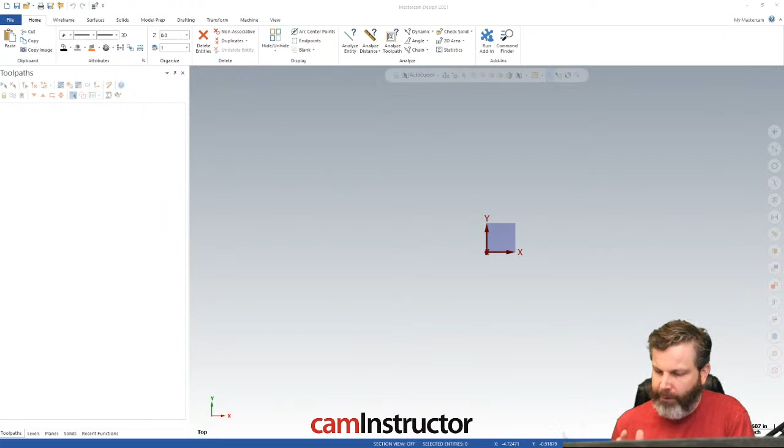Now, when we did the last stream, I said I would put up a poll, and I was going to ask what you guys wanted to see as far as what we go through in the next stream. And I did that, and one of the options was something advanced in Mastercam, and there was an option for something basic and some other stuff. And basically the majority came back and said they wanted to see something advanced in Mastercam.

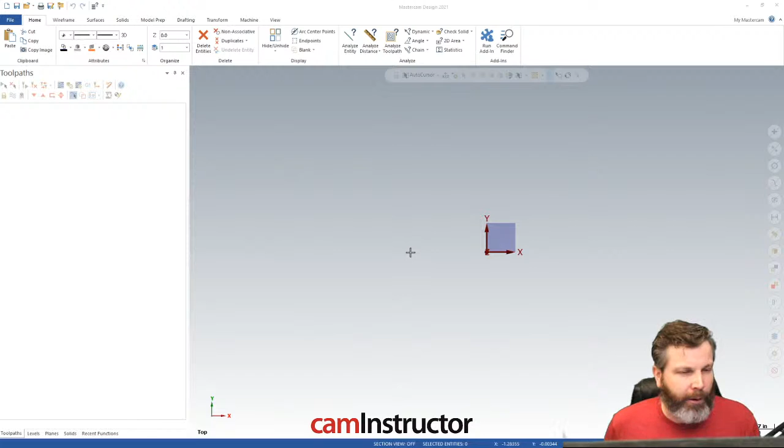So it's still pretty wide open on what that could be. I interpreted this on my own as to what I think could be advanced, while still trying to come up with something new and different that maybe others aren't doing in their streams or their webinars. Resellers are always doing webinars on the latest and greatest toolpaths and all the different little switches you can touch in them and make them better. So I wanted to do something advanced, but still do something different. So that's what we're going to do today.

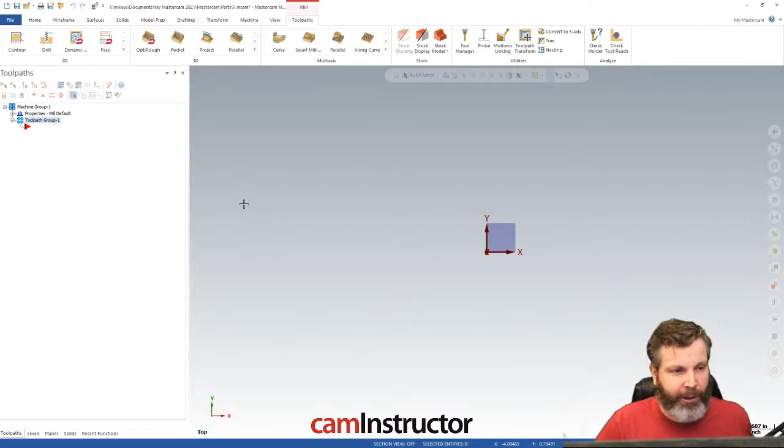And I'm going to start in Mastercam. And my advanced geometry and toolpath is going to be this drill. And I'm going to drill this point here, and I'm going to drill it 1/2 of an inch deep. Okay, so that's pretty advanced stuff we got going on here. I know, right? I promise you it's going to get better in a second here.

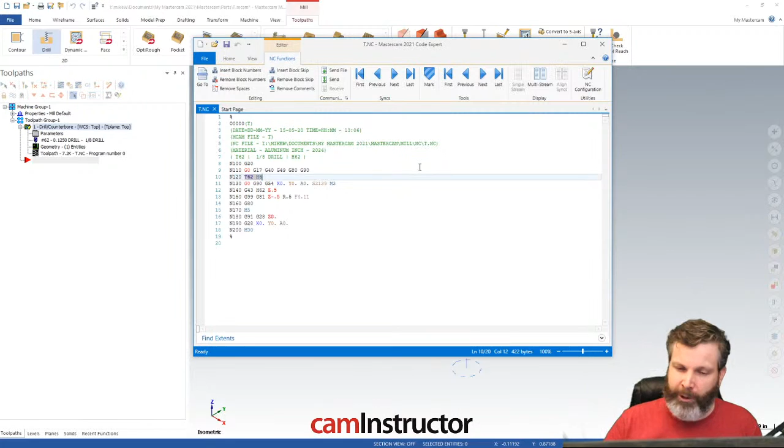But the point I want to make here is, yes, we can use different editors, but two, you should be using the editor depending on the job that you're trying to do. So in Mastercam, if you want to do a specific type of toolpath, you'll grab the correct operation for that. If you're in the shop and you want to hammer a pin, you go grab a hammer. You don't grab a screwdriver, right? So same thing, at least my recommendation is you would grab the correct editor based on what you're trying to do. So let's have a look at some different editors and why you might want to pick one versus the other.

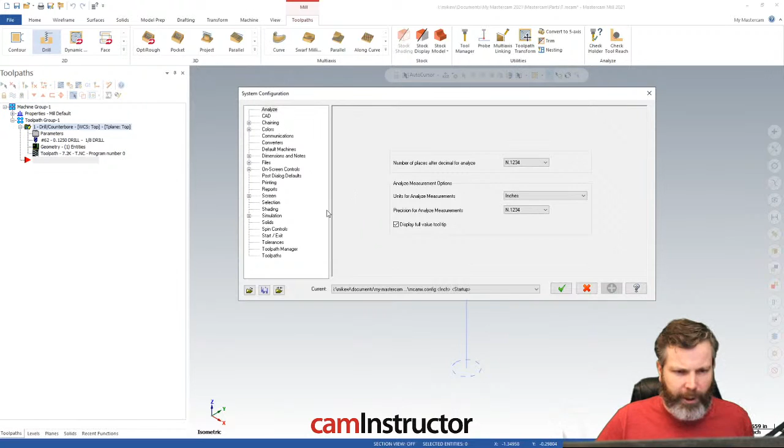Now, to change which one launches when you post G-code, that's in your config file. And it's on the start exit page, I believe. Yes, it is. And in here is editor. So by default, I think you're going to have options for Mastercam, Cimco, and other. Since I've already connected a few others in here, I'm already given the option to pick them. I'll go through a quick demo on how to pick something other in a second, but I'll go to this first Cimco here. This one, I believe, is included in the Mastercam install.

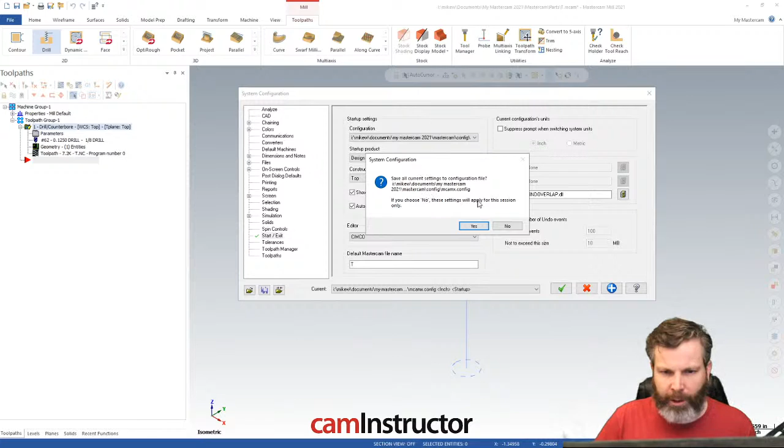I'm just going to click no here because I don't want to save this to my config file. But if I post this now, it should open up in Cimco, which I think will open up off my screen. I'll just drag it over here. I don't think we need it that big. So it opens up in Cimco Edit. Now this is the free Cimco. So there's some features of full Cimco that this one's missing. But it's still going to work fine as a text editor or an NC code editor.

It's got some NC code functions in here. Some typical text functions in here, copy, paste, find, all that kind of stuff. Still got your transmission tab in here, so you could send this over DNC to your machine if you're doing that. Some compare functions, which are very useful.

Sorry, I was just getting some feedback there. I'm not sure where that came from. That's interesting. I heard some feedback. That was odd. Back to where was I?

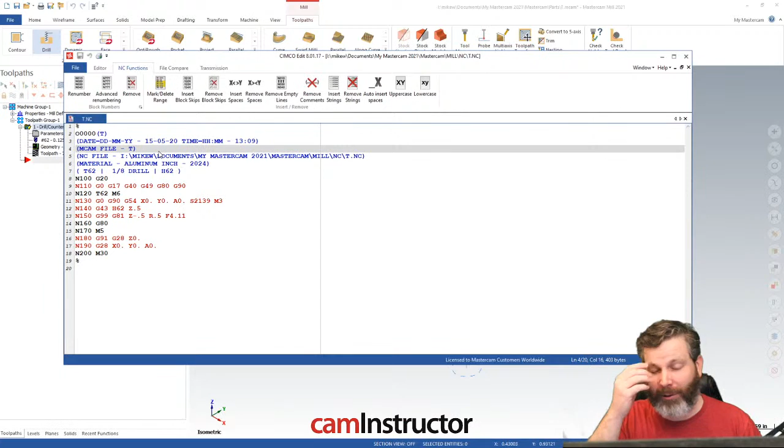I was talking about NC code in this text editor. So yes, there's less functionality in here than there is in Mastercam's Code Expert. So because there's less going on in this program, it will launch quicker. With that, oh, so there's a question here. What would I be comparing? That's a good idea. Maybe I should talk about that right now. And I can make this same point at the same time as I do a compare here.

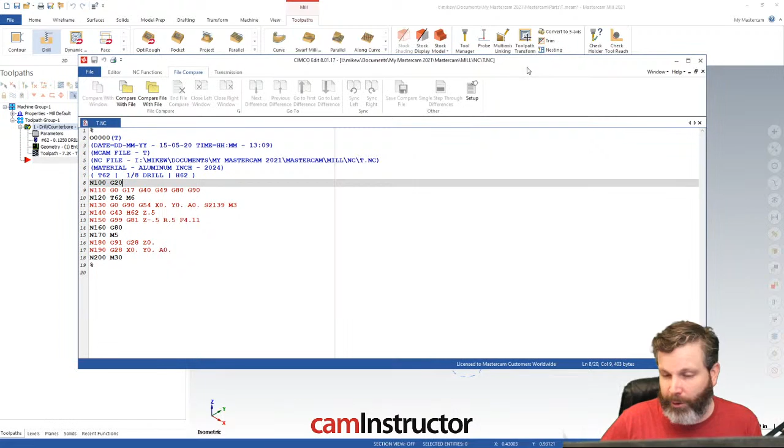So I mentioned that this launches faster than Mastercam's Code Expert. It's not that the code is posting any faster into them. It's just that the program takes a little bit longer to open. Now, if I don't close this program down, then the amount of time it takes to launch the program is now a non-factor. So if you don't close this editor down, how long it takes to post code won't ever be an issue.

I just got feedback again. I'm just going to turn my computer speakers down. I'm not sure if it's coming through there or what, but anyways.

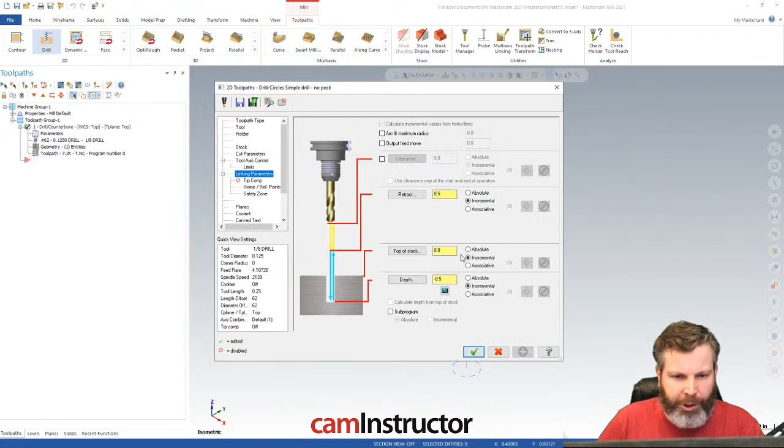So I'm going to go back into my main program here. I'm going to make a small little change. Let's go .51 deep, hit OK. And I did not close that editor down. I'm going to post this G-code after I rebuild it. And I'm going to name it something different, just so I don't lose that first file.

Okay, and so it opens up pretty much instantaneously. So when you're not launching the editor, it should take way less time to do this. So there I've got two different pieces of code. Now this is a very short, simple program, and it's probably easy to see where the change is right in our depth right there. But with these two files, I can click this button here, and it brings up a compare, and it shows me what's different between these two files.

This is useful if you are, say, editing a post, and you want to see how that post edit you've just done has affected your code. This makes it very simple. Another instance is maybe you have good, solid code that you've ran 100 times, and you've made a small tweak in Mastercam and reposted. Maybe you want to compare those to see where the difference in code is. Maybe by year in Mastercam, there's been an update to your post, and you want to see where the changes are. Very useful to do some compares, which in Cimco is just a click of a button.

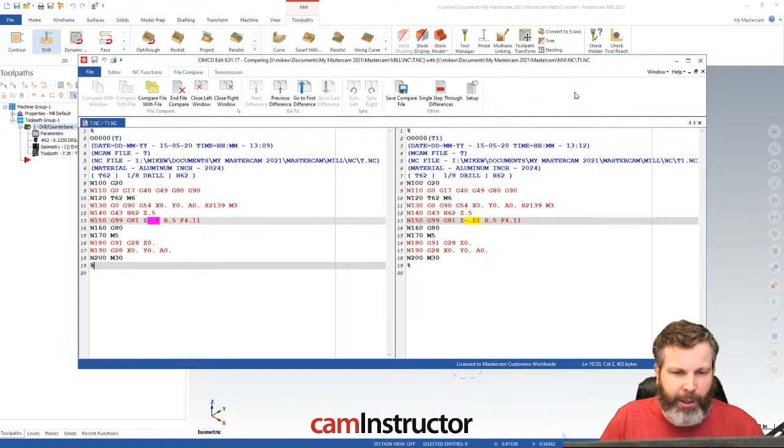We'll talk about that again back in Mastercam's editor in a second. Okay, so other than that, there's not much else that we can do in here. Let me just exit this compare. I'm going to close down T1. I'm going to mention this here. Maybe I shouldn't. I'm not sure if this is a bug or a feature. The big thing about Cimco Edit, especially the full version, is it's got the ability to backplot your G code, and you can see it in a little backplot window.

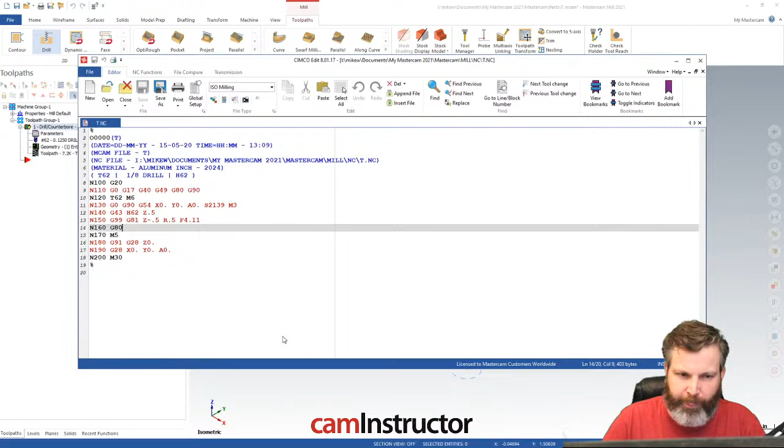In this base install of Cimco, there's no way to backplot that, but if you do the keyboard shortcut Control-Shift-P, it will open up the backplot, and you can kind of quickly go through your code and see what it looks like. One thing you need to know about this is it's not going to be machine specific as far as the codes that it backplots. So if you're running a Fagor or something or an Okuma, it might not be simulating this quite correctly, and for that you would need the full version of Cimco Edit.

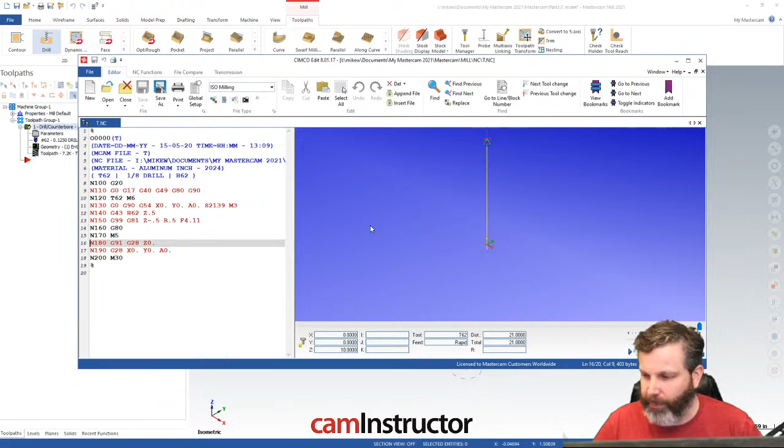But yeah, I just wanted to show that, that on this free one you can still get this backplot window up. And again, I'm not sure if you're supposed to be able to do that, but hey, there it is. Carrying on. What other editors have we got? Plain Jane Notepad. So Notepad is the Windows standard text editor, super lightweight. There's not much extra in it as far as functions.

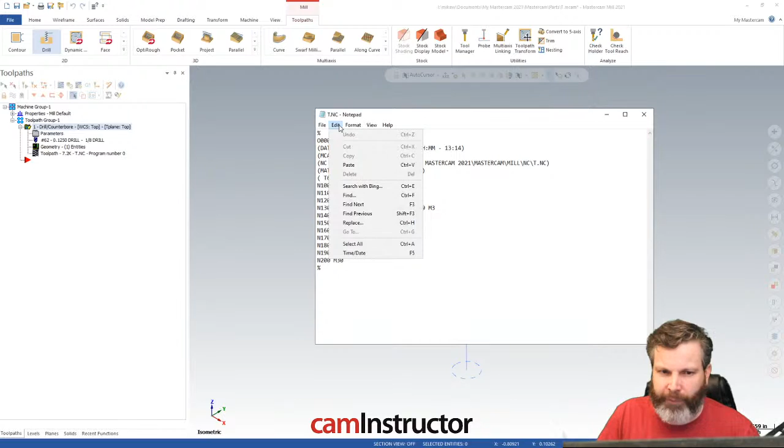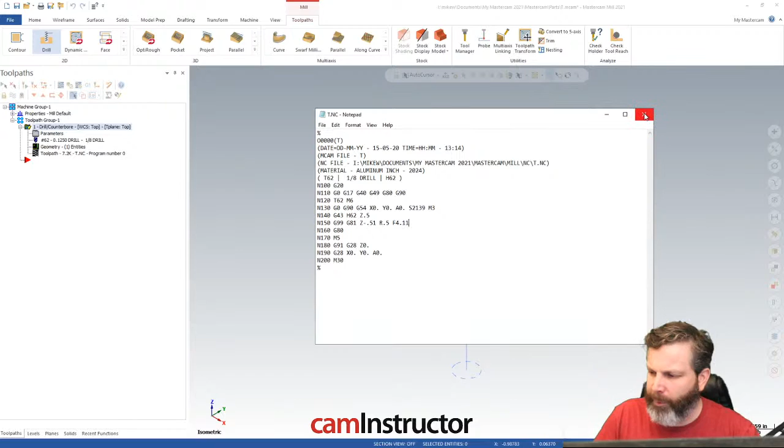But when I post this guy, you should notice that it opens up pretty much instant. I don't have much else in here as far as ability to do much. I've got my typical text functions, copy paste, that sort of thing. But for the most part, it's text. There it is. If there's not much you want to do to this text, this is probably a good option for you to use as your editor. Maybe you just want to save this out somewhere else, or just do a quick little print or something. Then this is probably a good option, Notepad. So Notepad, super lightweight, not much extra functionality, launches very quickly, and that's all there is to really say about Notepad.

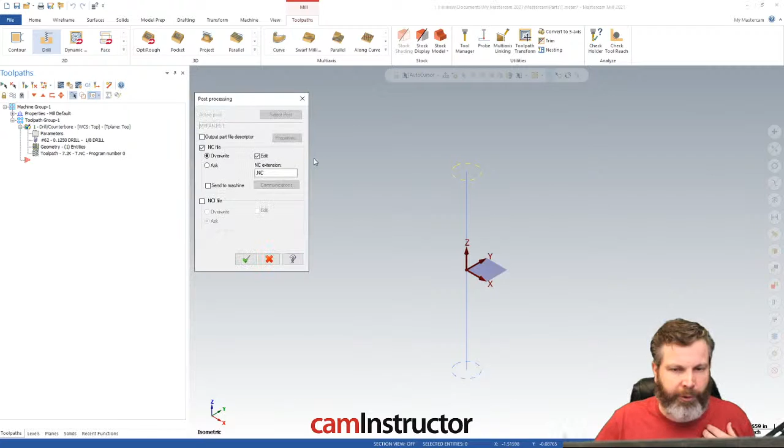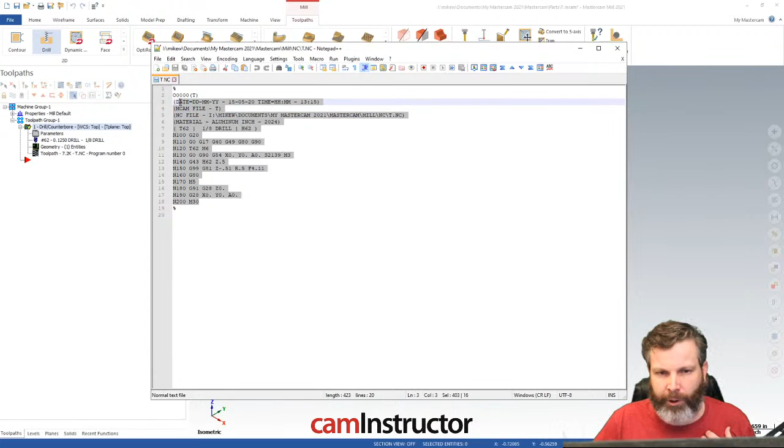Next up, let's have a look at Notepad++. This is what I would consider probably the best editor you can use if you're not using an editor for backplotting. So it opens up very quickly. There's a ton of extra functionality as far as interacting with your code. There's macro recorders. You might notice right now that the text here is showing up just black and white. It's just not highlighted depending on the code that's being generated, which you did see inside of Cimco, which you did see inside of Mastercam's editor as well.

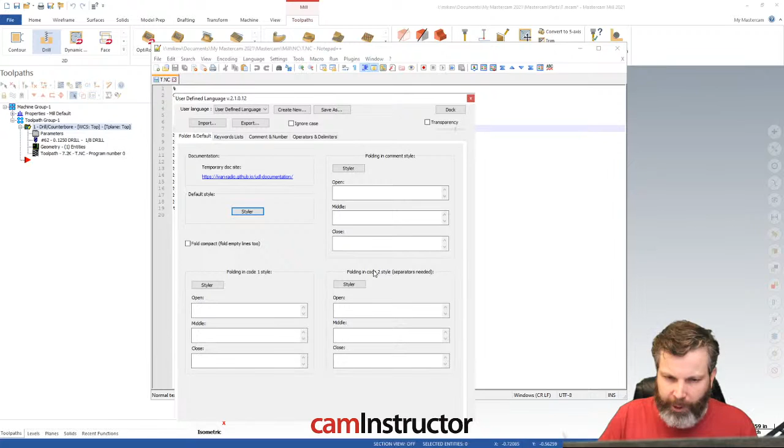However, with Notepad++, you can actually define your language. And with this, you've got super customizable ability in any code that you want. So in Cimco, what we saw was a line like this, the whole thing would show up red because it's a rapid movement. Inside Notepad++, I can get down to highlighting G0 as a certain color versus G90 as a certain color, versus Z moves a certain color versus X's, all that stuff. So nice that you can fully customize your code that way. It's got built-in compare as well, same as Cimco did. But yeah, Notepad++ is probably my go-to editor for anything unless you want to do backplotting.

So with that, I'm going to finally touch on the full version of Cimco. So this one, you have to pay for it. It costs money. You know, with that money, you do get some extra goodies.

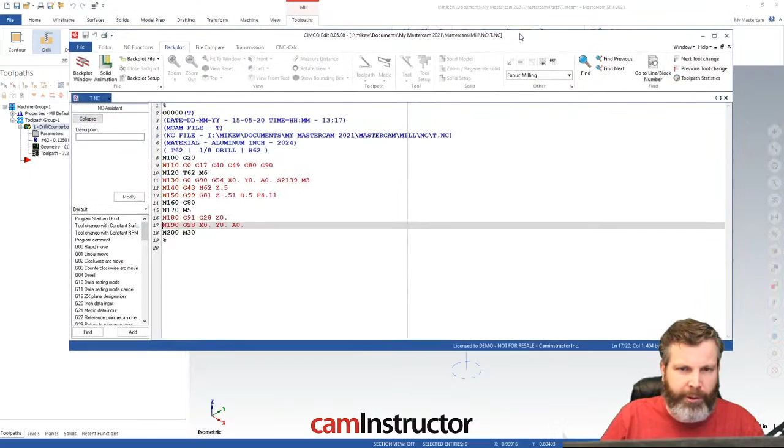And this will take a second to load up because it's got those extra goodies to deal with. So there's that highlighting I was talking about, where a rapid motion shows up all red.

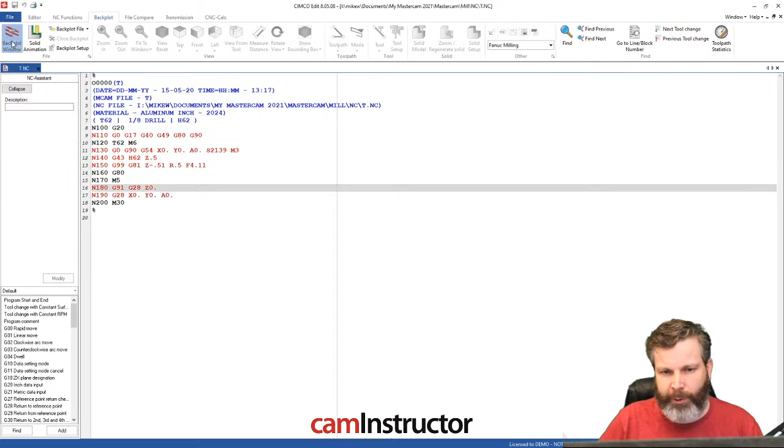This full version of Cimco, at least my full version, has got that backplot we talked about, a little cheat to get into. It's also got solid animation as well, so you can see your code.

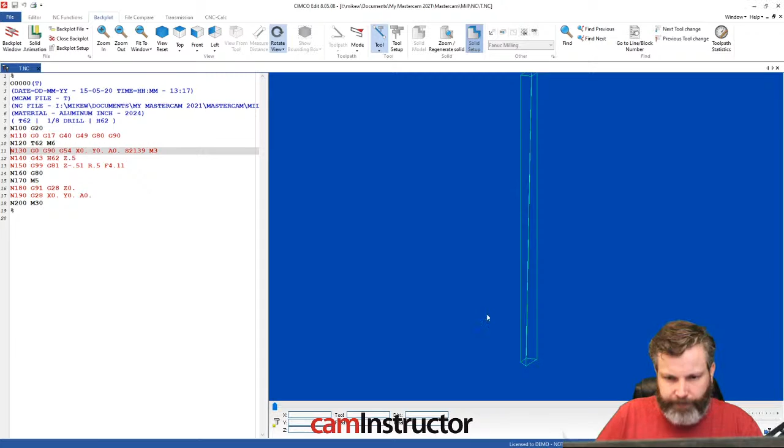Let me just do a quick little stock definition there. And you can actually see this thing machining a solid model. Okay, so that's, again, useful.

This is different than Mastercam because Mastercam will simulate the programs that it's made inside of Mastercam, but to get to G code, it has to go through a post processor, and that resulting G code can be different than what you saw in Mastercam. Although it shouldn't be — if you have a guy that's good with his post, what you see in Mastercam is what you would get in your G code.

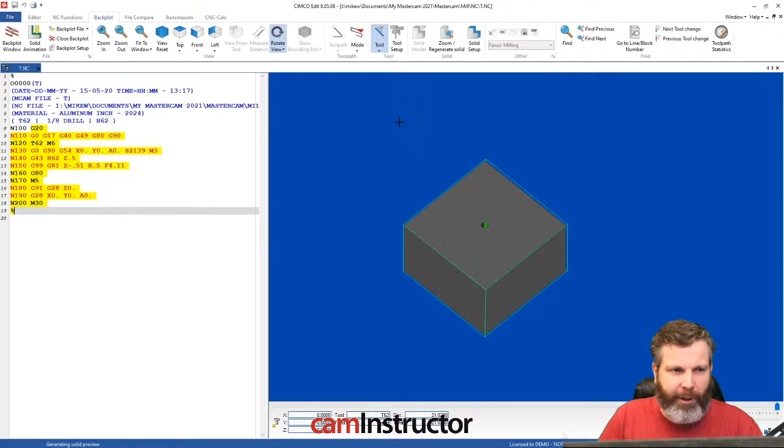But something like this is very useful, and not a bad double check before you put it on your $1 million machine and push go. Okay, so that was the full version of Cimco.

Now, why would we pick something that's not Cimco? Let me go back to this for a second — back to my analogy, we're grabbing the right tool depending on what it is you want to do. If you need to do synchronization in your NC code, Mastercam is the way to go. If you want to be able to backplot your G code, Cimco is the way to go. If you're doing any sort of heavy editing in the text, I would suggest Notepad++.

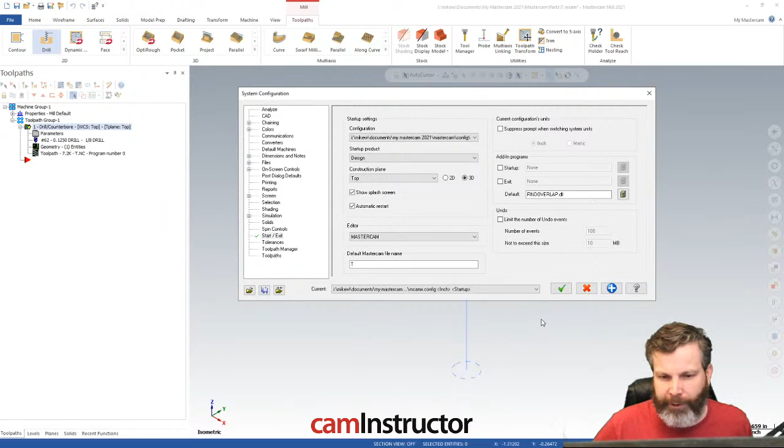Mastercam, no, I want to go back and touch on this for a minute. So this is where we're finally going to get into something a little more advanced, which was the whole point of talking about editors. The Mastercam editor, as mentioned, has extra functionality into it. I'm just going to launch a version of it here.

Just give me a second to open this up. Here we go. Kind of. There it is. Okay, let me just leave that minimized for a bit.

There you see file compare. So Mastercam's editor here would need an external program to do the compare, so that's a difference there as well. If you want to do a file compare, something else needs to be added into the Mastercam one. As I mentioned, one of the big key factors or bonuses in the Mastercam editor is the multi-stream.

There's another thing here I wanted to point out. If you come in here and go File, New, we've got options for different file types we want to create: an NC file, a VBScript, or a code document. This is the one I want to look at right now, this Mastercam VBScript.

VBScripts — I guess before we dig into this, let me just have a peek at comments, and before we go on to another topic I'll just see.

So we talked about the comparing — what the comparing is for, what we can compare.

What video software are you using, Camtasia? For the videos that I record and post, yeah, it depends — sometimes Camtasia, sometimes Premiere. For live streams like this, it's a software called Streamlabs OBS.

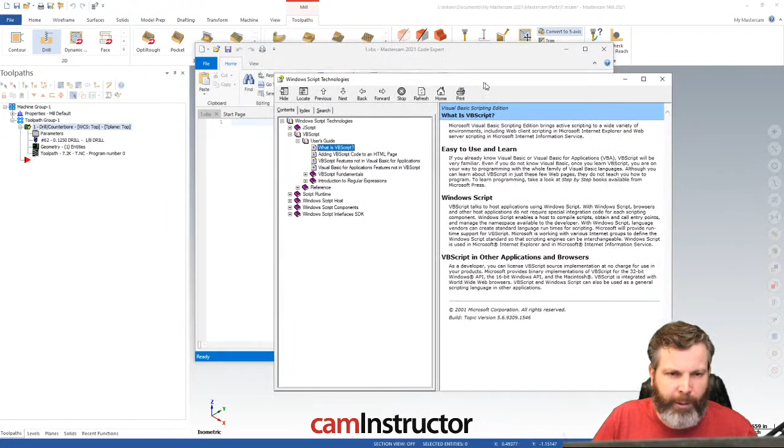Number one is, for a better word, it's kind of dead. Why am I showing something that's kind of dead and not supported anymore? Because I think it's the best way, the easiest way to dabble with this type of stuff.

What is this type of stuff? So VBScript is basically Microsoft's scripting language, and it's very similar to VBA. Anyone who's dabbled into automating Word, Excel, or Outlook knows those programs have a built-in application called Visual Basic for Applications. The language in VBA is very similar to VBScript.

But basically what's happened with this VBScript, I think X9 was probably the last one where they really still had it incorporated with Mastercam. And it's slowly been getting less and less every single year, which I think is unfortunate, because it's a good place to start if you ever want to get into automation of Mastercam.

Typically, the right way you're supposed to do this is download and install an edition of Visual Studio, and create an actual .NET hook or a C hook. For me, if I just want to dabble with some stuff, I don't want to go that deep. I just want to do a quick couple lines of code, push go, and see if it worked or not.

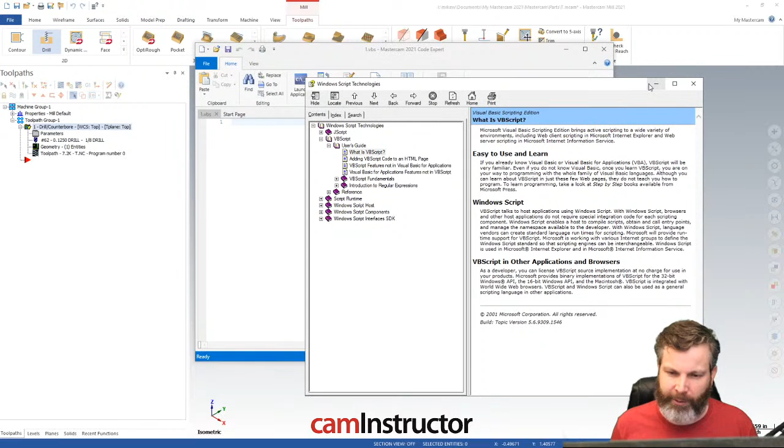So like I said, it's been less and less every single year, but it still works. And I think the best thing about VBScripts is if you had a script in X9, it still works in 2020 or 2021. You don't have to change it. It works.

Now, why did I get to this talking about VBScript? Okay, let me just move this off to the side for a minute. I came to this topic for a reason. I went down a rabbit hole one day. I was researching some information on a new video I was trying to make, and it was going to be a video on verniers.

What a vernier is, how they work, the concept behind it. As you get into it, you start to do some research on the history of verniers and where it came from. This guy that made the vernier, did he just come up with this idea, or was there other inspiration behind it? And there was in fact inspiration behind it.

Let me just bring this web page up here if I can find it. Yeah, this was a heck of a rabbit hole I went down one night, so just bear with me for a second. Basically, this vernier guy based his concept on this thing called a nonius device.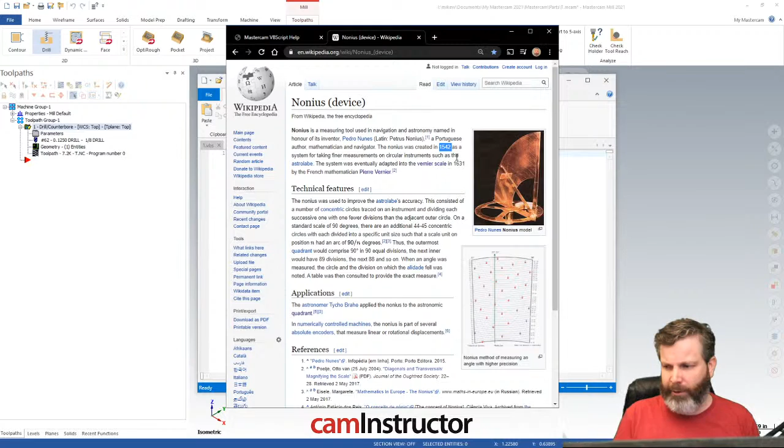It was way back in the day, like 1500s. So what these guys were really doing was navigating with their ships. When they're navigating, they're lining up their telescope with the North Star, and basically the angle that they point at tells them their latitude and or longitude.

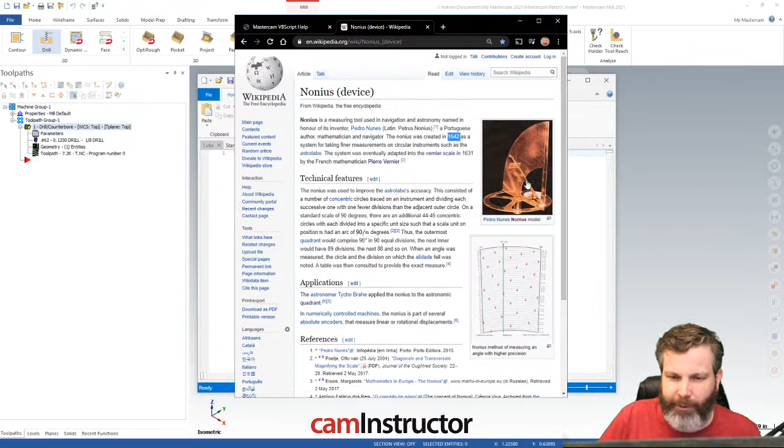So the thought here is that before the vernier scale, there was no way to tell where you were. If you had 38 degrees, 37 degrees, and you were in between, where were you? You didn't have an accurate way to tell. So they came up with this scale called the Nunes scale.

So I'm researching this, and I'm trying to find a picture of it to see what it looks like and how it would work. The best I could find is the pictures on Wikipedia. And this, to me, doesn't really show what works. I don't get it. It doesn't make any sense to me. So I want to be able to draw this up and see how it works.

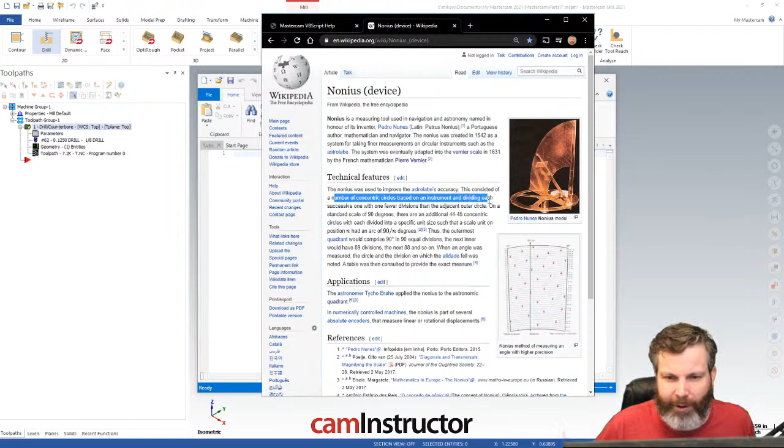Now, I'm given a description here of what this device actually is. Basically it says this is a number of concentric circles offset from each other — a bunch of circles, one smaller than the next. On each of these circles, there's one less division than the previous circle. So 45 circles, quadrants we'll call them because we're only doing 90 degrees.

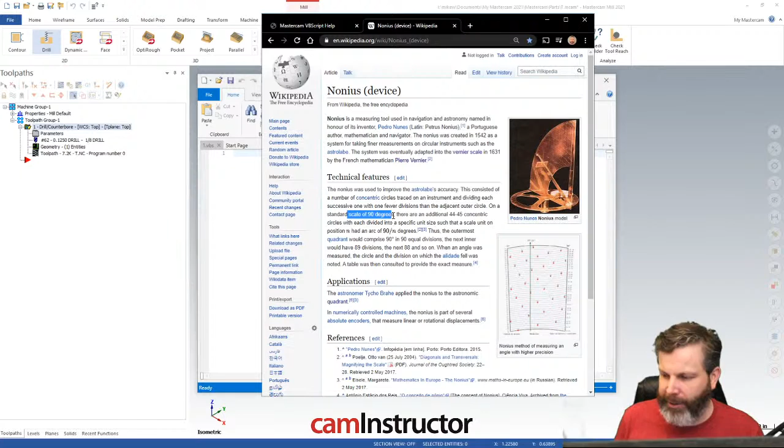The outside arc would have 90 divisions. The next arc inside would have 89, the next one 88, etc., etc., etc. So I wanted to draw this in Mastercam, and you can imagine drawing 90 arcs and then 90 points on the arcs would take a lot of time. So that's when I came into this VBScript here to try and do something.

So to just give a quick example of what you can do here with this VBScript and why it's important — obviously you need a little bit of knowledge on how to start some of this code. But basically, as you're typing, you can see some of the words are highlighted, and I'm getting some auto-completion.

Let me just draw up a quick point. I'm going to set this, and you can say equals, and do an MC. So basically, the point I'm trying to make with this VBScript is that it's got this information built into the Mastercam editor. When you're doing this, you can get that auto-completion, and hints about the code you're trying to type.

It helps you when you're developing your scripts. Now let me just open up the finished script here, and we'll jump straight over to this. So when I created this script, I started with basically an existing piece of code that was made by, looks like, Mick George, back in 2003.

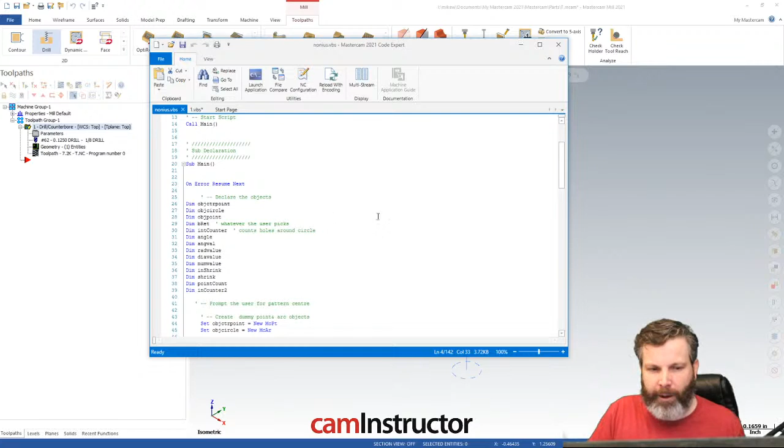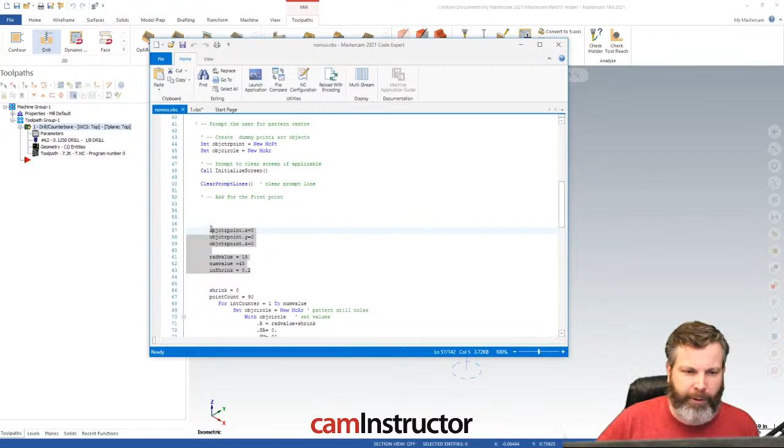So I took this code that he made, and I edited it to make this Nunes device. The other reason why I went this route is I don't know how big I want to make the circles, or what I want to mark the points on the circle with. So I'm able to make those adjustments in code, and then run them and adjust as needed.

There's another thing we need to point out about the newer Mastercams is that VBScript command is now hidden, and you'll have to kind of search for it. And this is the right one, so if I just click on this, it'll run the code, and there it makes all this geometry in a matter of seconds.

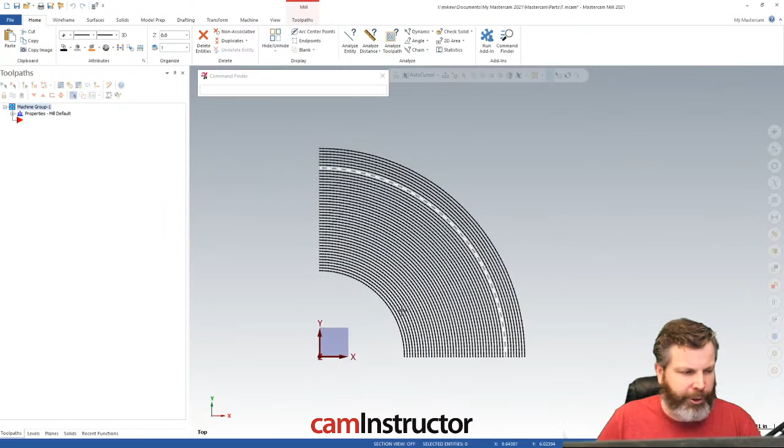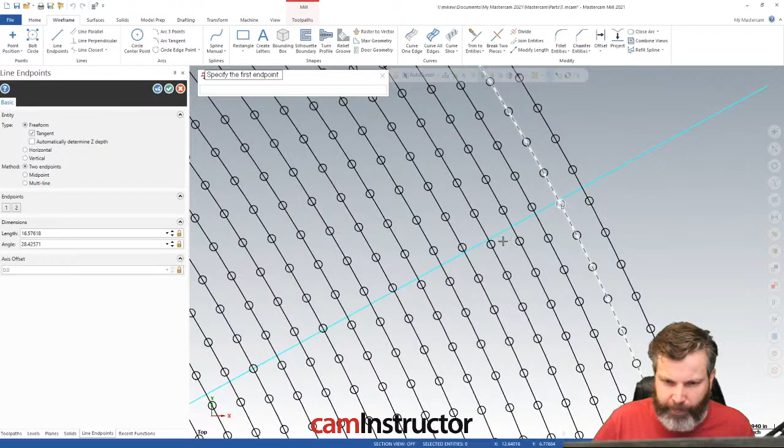Basically, you can see those arcs, you can see the points I've created, and I was trying to get the idea behind, you know, you can see here when this line's drawn out, say this was 27 degrees, this was 28, and when this thing moves, they would pick the point inside that it best lines up to, which is probably that guy right there, and that would be the angle of that line.

Okay, super cool device technology, I guess we'll call it, for the 1500s. But you can see where it was lacking in maybe readability.

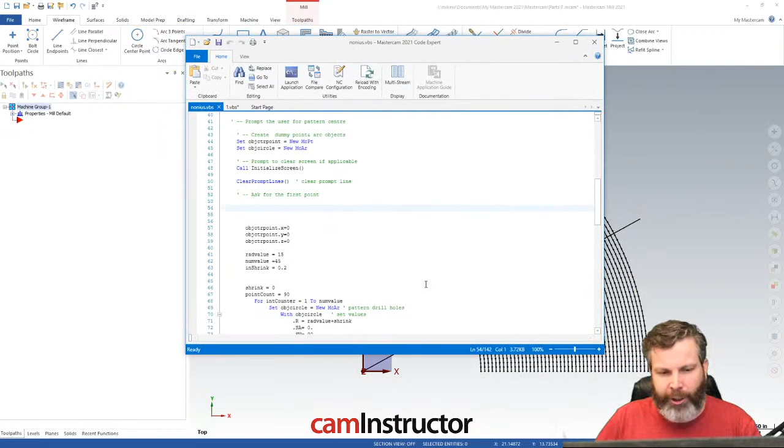Again, using this VBScript, I wanted to try and figure out how accurate was this thing. What were they dealing with? Were they dealing with, you know, 2 minutes of accuracy? Was it 5 minutes? Was it 12 minutes? So in my code that I already created to make all this geometry, to try and figure out how accurate it would be, I made a little bit of extra code that plotted these points in a line.

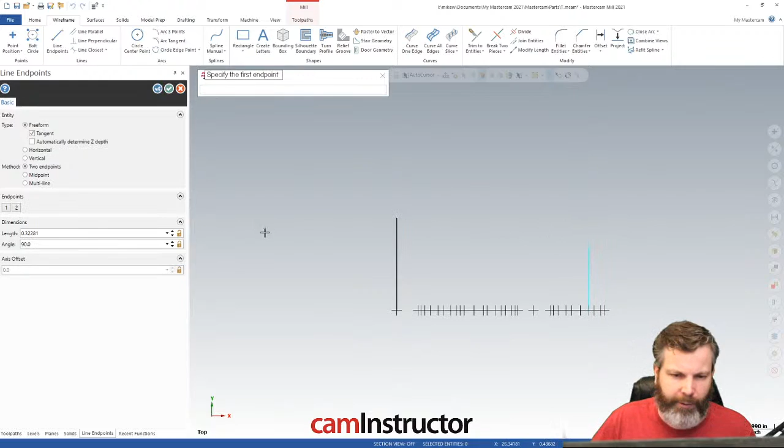And this is all coming from created code that I can adjust on the fly. Basically, it placed the point at each division that you would see inside of that range. So there you can see the points, they're kind of spread out, they're not even. So there's the limitation of this Nunes device, whereas unevenly spread points, not super accurate as far as each notch is, you know, 7 minutes or something.

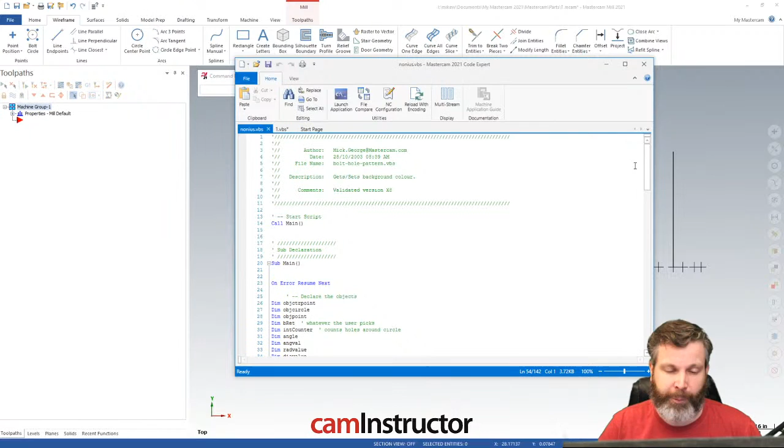And that's probably why Mr. Vernier decided to create the Vernier. Yeah, so anyways, that was a rabbit hole I went down as far as finding something that I wanted to wrap my head around and experiment with, but then deciding that brute forcing the geometry creation would not be efficient, and that using something like a VBScript to create that geometry that I could easily edit and modify would be a much more efficient way to go about spending my time.

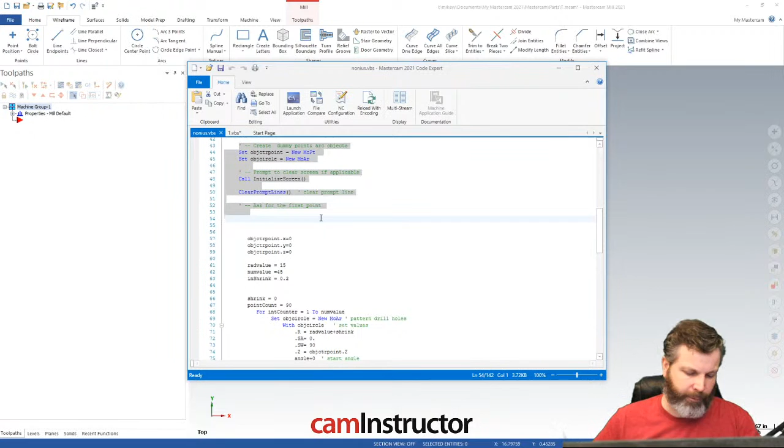I'm easily able to change the outside radius here, change whether these are points or circles, all sorts of stuff like that. So the main point being, a lot of people, when they try to get faster at Mastercam, they really start to focus on keyboard shortcuts, making commands with keyboard shortcuts, getting extra keyboards that have all these buttons in it that they push to automate these things.

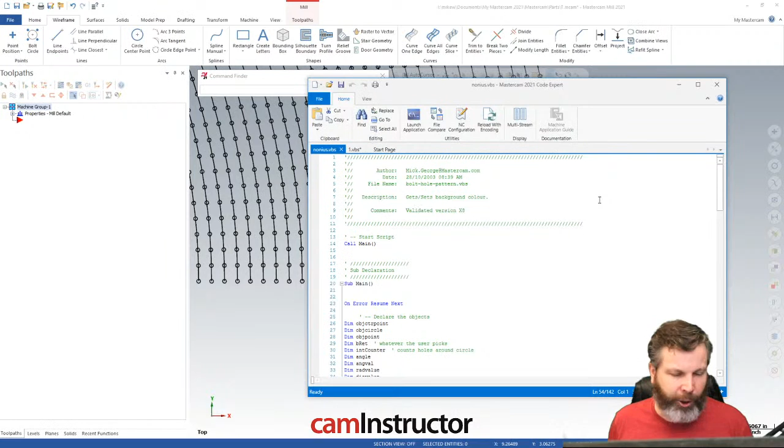Whereas something like this, if you're able to utilize VBScripts, or one step further, the NET-Hooks or C-Hooks, you could probably get a lot quicker, a lot sooner, without having to memorize keyboard shortcuts. This will make you way faster as far as how quick this thing can go. This thing can run through a piece of code faster than you could ever do a keyboard shortcut.

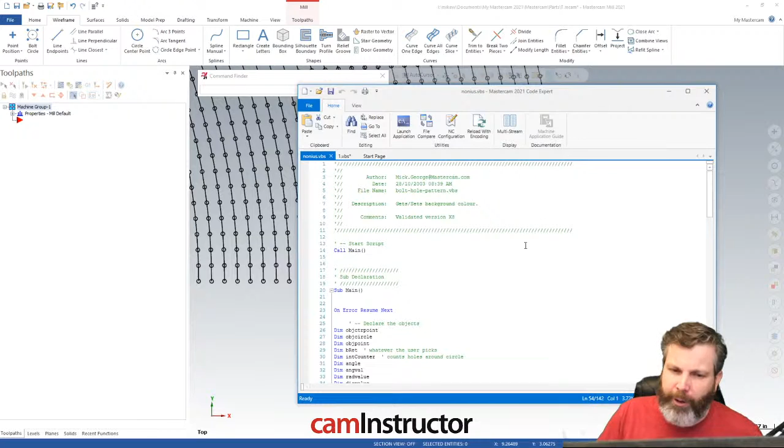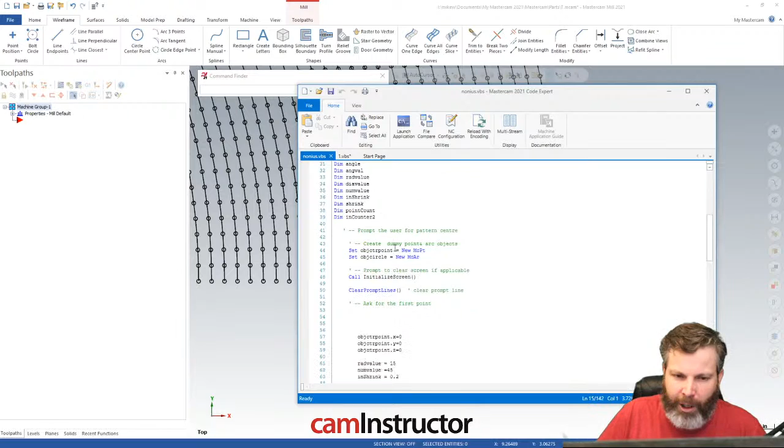But VBScript, I bring it up because it's easy to learn. One, it may not look easy, but there's lots of tutorials online. There's even some in old Mastercam. It's not complicated code. There's no extra work to connect this thing to Mastercam. You just basically run the code you save. You don't have to worry about connecting softwares. Same as VBA would work inside of Excel or something.

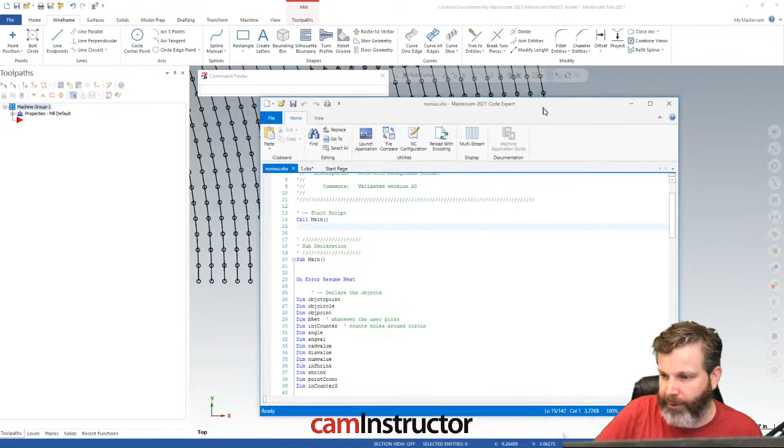And it's a good way to step into an automation world and not go too far to start, because it is super overwhelming when you get into this programming language. But definitely useful. So again, that's another advanced functionality of the Mastercam Code Expert, which gives it another specific use. So this tool, if you want to make VBScript, this is the guy you probably want to use to do that. If you want to do, like I said, backplotting, you're going to be going over to Cimco.

Okay, so that's pretty good, I think, on scripts. I don't want to get too far into it. I'm definitely not a subject matter expert on scripting, so I don't want to really get too far into it. I just wanted to kind of mention it there.

And let's peek back at the comments here for a minute. What do we got here? Oh, I got to go way up.

We got a new user of Mastercam. Yeah, that's good. There's lots of content out there that you can use to learn from. YouTube videos, probably stay away from, unless, of course, they're CamInstructor YouTube videos. Yeah, we've got a free course out there somewhere. You should probably go click on that, download those free lessons, and start your Mastercam learning down that path.

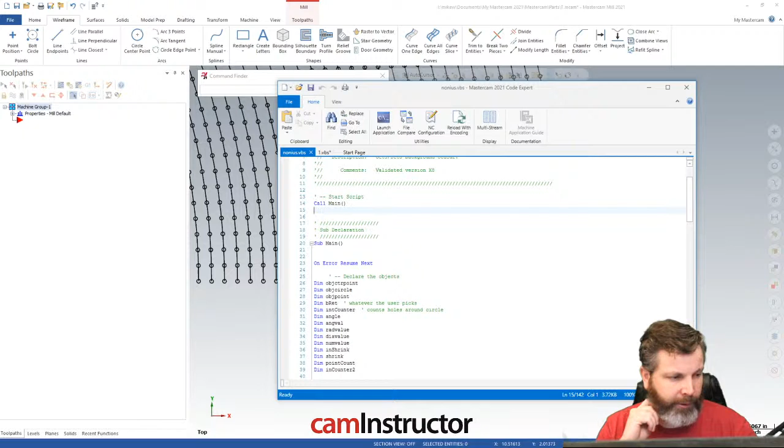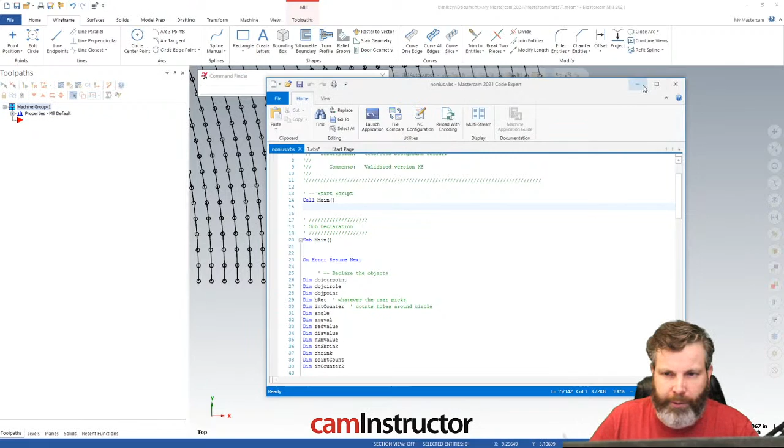Someone's got 2 questions. VBScript to make a personalized setup sheet. That's a little different than VBScript. I don't have anything prepared to answer that, but let me just go over here for a second. You're talking more Active Reports. It's another software, and you can edit inside of the Active Reports editor and do all sorts of customization inside of that guy. Yeah, that would be a long video. There's so much stuff you can do in there. And again, I'm not a huge expert on Active Reports, but it's something we could cover basics of for sure.

Mill turn is a new technology. I don't know why Mastercam not activated in demo version. Yeah, so the best way to try and get Mastercam to include mill turn in the demo product would be to ask them. And I think the problem with it is the machine. You need a specific machine. I think that was some of the reason why they didn't want to include it, because dealing with the machine was a problem, and giving out a free machine or something. I'm not sure. Maybe one day it'll happen. Hey, you just got to ask them. If you don't ask, you never know. The worst they can say is no, right?

Mill A-axis drill. Well, yeah. I guess you may have seen in my posted code, since I'm using the default machine, it may have posted out with an A-axis rotation, which is not good. So that's probably a reason why you would be using your NC code editor, to go in and take those A movements out, or edit your post to make the correct G code, right?

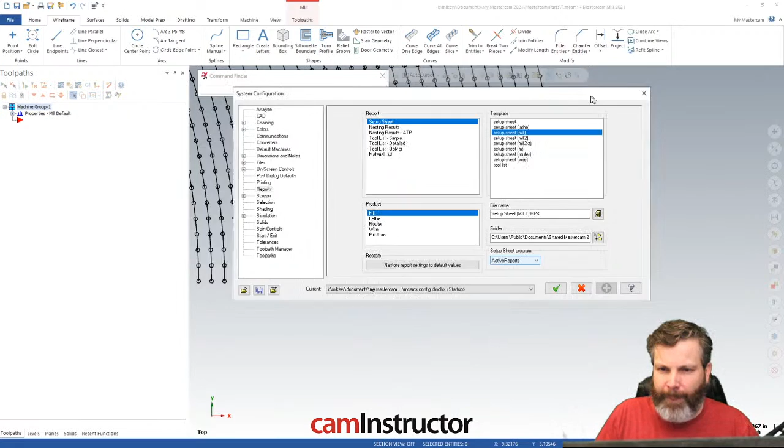Okay, so I think I've covered everything for the most part. Talked about editors and reasons why you would pick one versus the other. Pick the right tool for the job that you're trying to do. Did a quick overview of VBScripts, kind of talking about how it can make your life easier, even though it's going to be super intimidating to start.

It is scary, and there's a lot to take in, but if you were to allocate a half an hour a day for probably a month, you would be surprised at what you'd be able to do with a VBScript. For that matter, even if you went all the way in and hopped right into making a NET-Hook or something, again, a half an hour a day, looking at sample code, looking at some tutorials, you'd be amazed at how far you can get in a month.

Okay, a couple more comments popping up. "Fairly new to Mastercam. I did it for 1 year in junior engineering. Any tips to help?"

With any software, the more you use it, the better you'll get with it. If you used Mastercam 2 years ago for 3 months, and you try and go and use it today, you'll probably struggle. If you use a software every single day, you're going to get really good at it. You'll start to remember shortcuts. You'll start to remember things you did yesterday that helped you out, and you can use them going forward. So with any software, if you want to get better with it, you just have to use it.

So maybe in Mastercam, like I did here, I went down this rabbit hole. I wanted to figure out how this Nunes device actually works, so I created this geometry. Learned a bunch of stuff while I did it. Wasn't probably the best use of my time, but hey, I learned lots. And then tomorrow when I go to do something else, things I learned when I did this will make me faster. So even though I did something today that slowed me down, going forward, I'm going to be that much better.

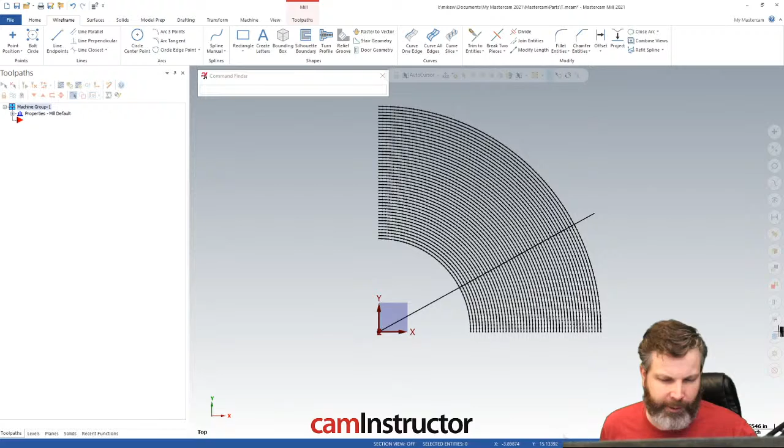What else we got in here? "5-axis programming, best site to learn. Have you used other software to program 5-axis?" I'm not sure if we're asking a question about the best site to learn 5-axis or making a statement. We have 5-axis stuff on our course site. We have 4-axis stuff on our course site. We have lathe, all that kind of stuff.

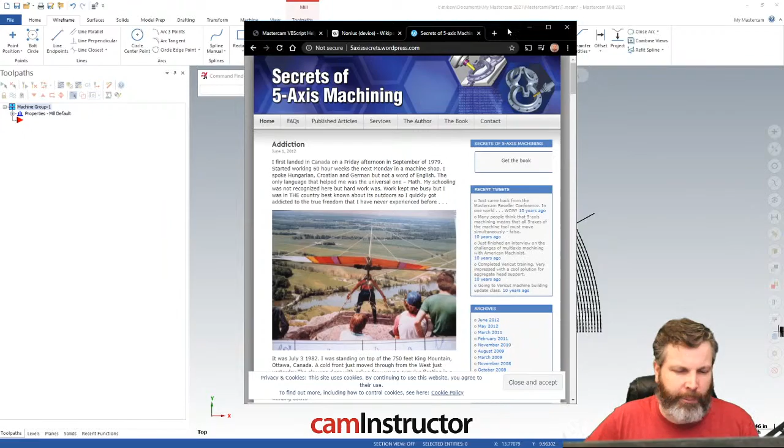Secrets of 5-Axis Machining by Karlo Apro. I could be mispronouncing the name, I'm sorry if I am. Excellent book. I'm sure it's available on Amazon. Everything's available on Amazon, right? So if you're looking for something other than software to dive into 5-axis stuff, there you go.

Yeah, some people are helping me out here. Thank you for the help. It's Friday, and it's the afternoon. I'm allowed to struggle with things.

What else we got here? "Does CamInstructor have training for machine creation for posts?" No, we don't go that specific or that deep. Should we? Could we? Those are all questions to be seen.

Yeah. Maybe if we were to do it in conjunction with someone else, like a post developer or with Mastercam, but for the most part, when you get that specific, you're going to want to lean on your reseller or Mastercam for some extra information on that stuff. Not to say that we couldn't do a live stream on it and maybe cover some of the high points, but yeah, it's good to know.

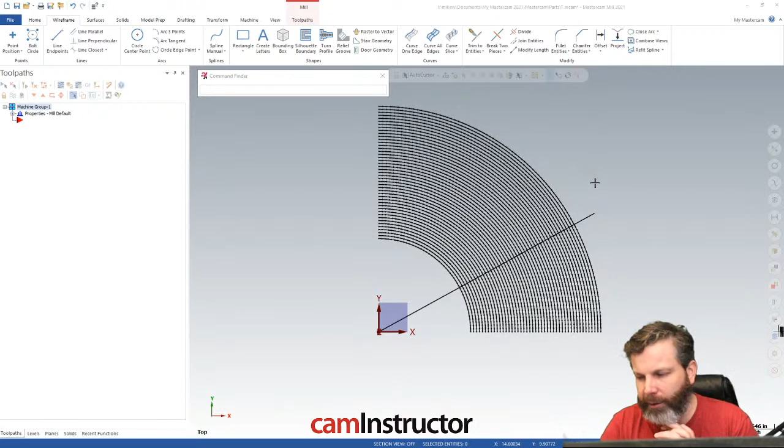C-hooks are using VBScript? How hard is it to develop a C-hook? C-hooks, so the name C is referring to the programming language used to develop it. So C-hooks use the C language. I'm not sure if it's C or C++. But then there's net hooks, and net hooks you can use, as far as I know, either C# or VB.NET to develop.

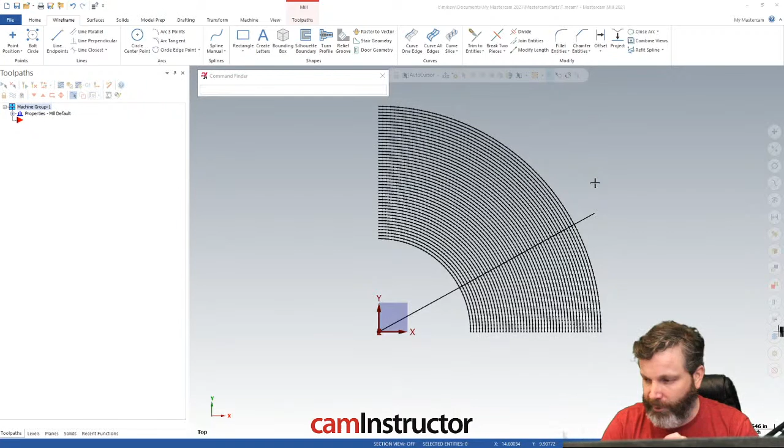And as far as I know, if you're in the C development world, you have access to more stuff. So that's another decision you have to make: what functionality do you need, and then which language do you need to dive into, the .NETs versus the C-hooks. Again, not a subject matter expert, and I'm sure anyone with programming knowledge watching this is probably screaming at the screen going, you're wrong, what are you talking about? But doing my best.

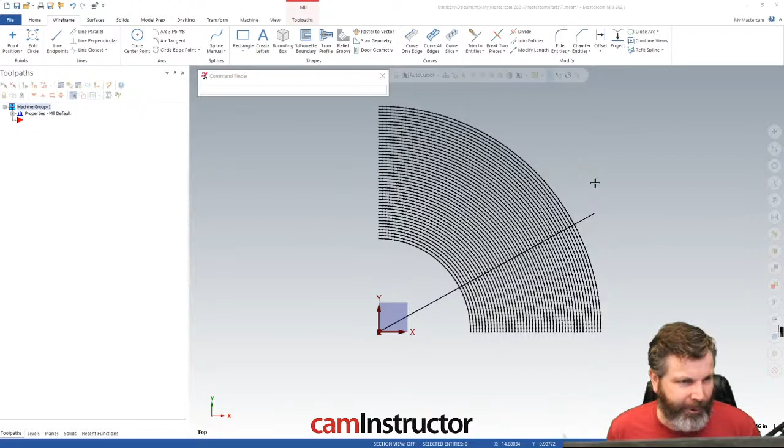Josh comes back: using 2D dynamic mill. Yeah, we'll do one with dynamic mill, absolutely. We do have some videos on YouTube and our blog posts that dig into dynamics quite deeply. Let me just see if I can find something here quickly.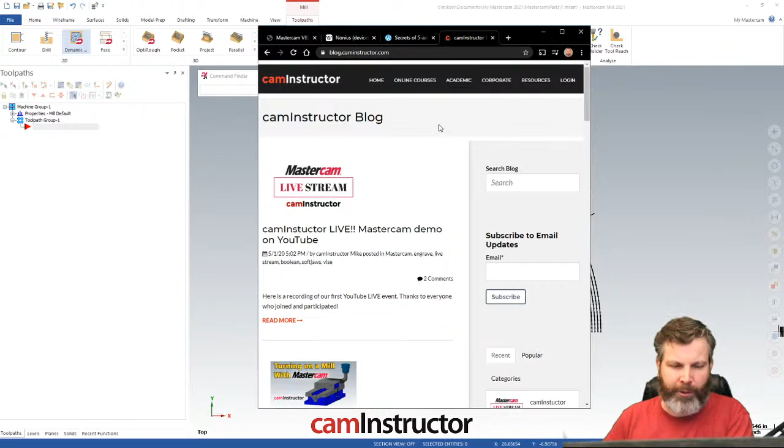And on here, I know there is somewhere. There's lots of posts in here. So there's a part 4 on chaining inside dynamic mill. So there's 4 parts that specifically focus on chaining. And I think way near the end here, there's a bunch on every single setting inside of it. So what does each of these settings do? I think it's right near the end.

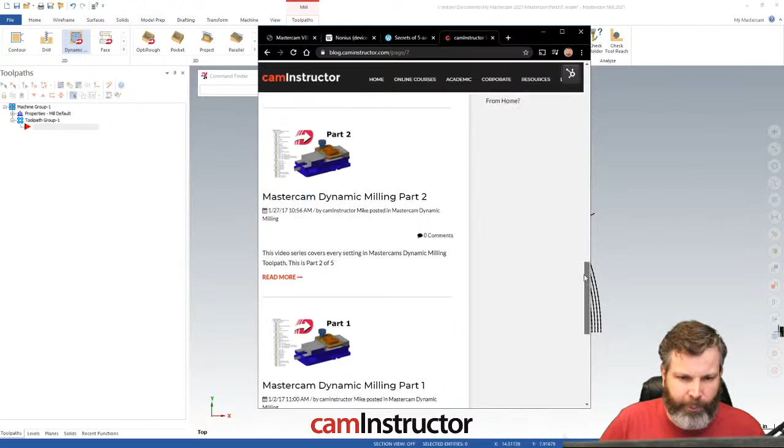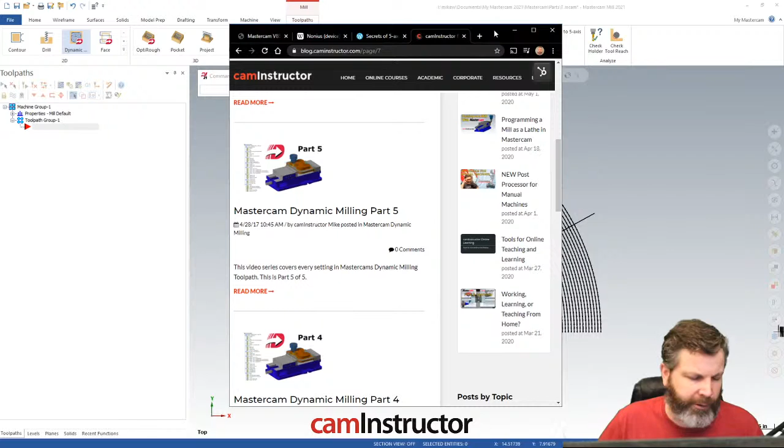But yeah, check out the blog. If not, I'm pretty sure they're on the YouTube channel as well. There you go. Dynamic milling. There's 4 or 5 videos there. I think these are from 2018 or 2017, but the settings and parameters are still basically the same. There might be a few interface changes if you're working in 2020 or later, but the information is still good. So check out those videos, and if you have questions when we do a live stream, we can definitely talk about those.

Some of the toolpaths are ModuleWorks as well, and the verify engine. But where'd that go?

Where did it go? I was just reading a comment, and it's gone. There was a point there about ModuleWorks stuff. Yeah, there's ModuleWorks toolpaths. I think the majority of those would be some of these in the 5-axis world. Still, some of these are Mastercam toolpaths.

I don't know which is which, but some of these are ModuleWorks, and I'm sure if there's someone watching who knows more about which toolpath is which, they're probably yelling at the screen going, no, don't say that, you don't know what you're talking about. But I'll say this, some of these are ModuleWorks. As far as I know, I don't think any of these ones are. I think all these are Mastercam toolpaths, and same with 2D. As far as I know, these are all Mastercam toolpaths.

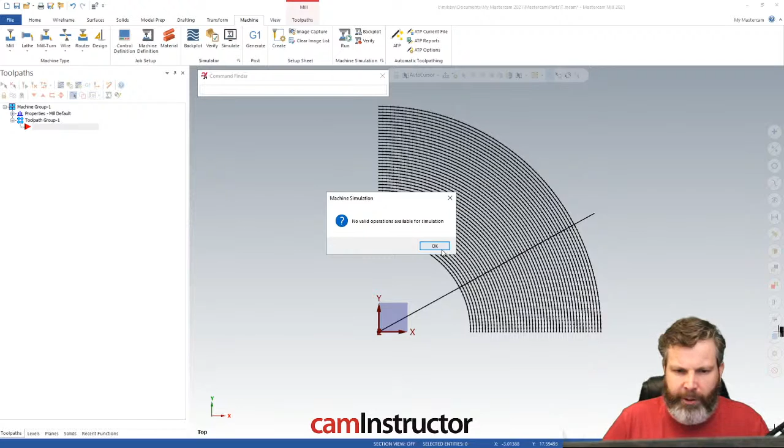Verify. This Verify is Mastercam. This Simulate is Mastercam. I don't know if it uses any background stuff from ModuleWorks, but this one over here I think is a ModuleWorks simulation. Again, I could be completely wrong, but that's my knowledge. There is some ModuleWorks stuff in there. I don't think it's a bad thing. Some people think it is, but the ModuleWorks stuff is fantastic.

And I think the main difference there as well, other companies can use ModuleWorks toolpaths, but those ModuleWorks toolpaths still have to be incorporated into the software, one, and two, they still have to be supported on the output in the post. And I think that's the main difference between ModuleWorks in Mastercam versus ModuleWorks in something else.

Some of them just take ModuleWorks and basically plop it down and say, here's this toolpath, use it. Whereas I think Mastercam spends a little bit more time and they try to interface it so that it looks like this familiar Mastercam and has some sense to working through a toolpath top to bottom. So I think they do a better job that way.

And the other point as well, if you do include ModuleWorks in your software, there's different levels. So just because you have a ModuleWorks toolpath doesn't mean you have all of the ModuleWorks toolpaths. Whereas I think Mastercam has a good portion of them. I don't know enough about ModuleWorks to say if they have them all, but they've got lots. The good ones anyways, the ones I like to use, they got them.

ModuleWorks supplies a lot of technology to lots of companies, that's what they do. They make toolpaths and they sell them. So they're all over the place. But like I said, it's how it's implemented in the software and how that's then created into G-code, where I think Mastercam is ahead of the rest. Definitely focus those ModuleWorks questions to CNC because they are definitely more knowledgeable than I am about it. But I did my best.

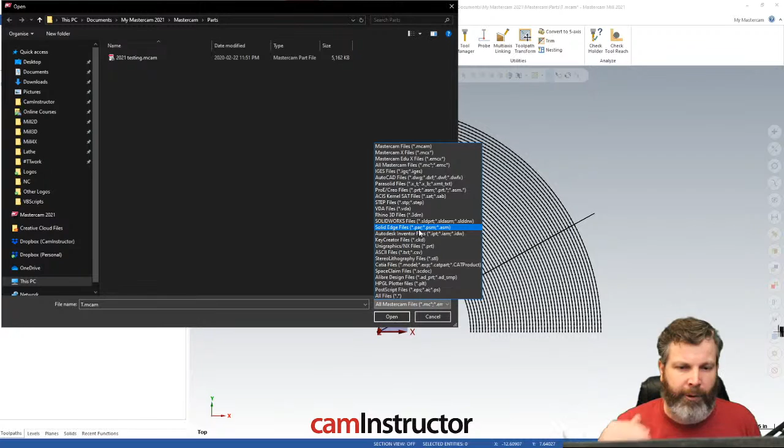If we do an Open, let me do a quick browse here. From the pull-down, these file extensions, it can open all of this stuff. So if you're trying to export natively from other software that maybe you don't see on this list, what you would want to do is see if you can export from that software into something that's not specific, like a STEP or an STL, then you can easily bring it into Mastercam. And that would be solids-based or wireframe-based type of stuff.